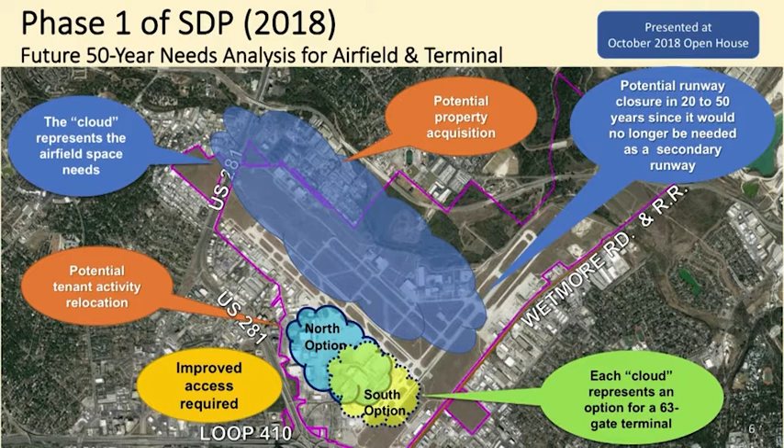So then we had another slide we used at these meetings, the open houses and with council, where we specifically said, will it fit? The answer is yes. And there's of course some caveats, including governmental approvals, funding and environmental approvals. Some land acquisition would be needed, and several other caveats. But this was accepted by council on October 31st, 2018, and that answered the question.

So then we needed to change to a new phase of work. Okay, now that we know that, we're not looking for a new airport site. We're looking at how to best make things fit at this airport. So we kind of changed gears. We said in phase two, okay, now we're starting over. Now we need to figure out how it's going to fit. If we know it fits, how is it going to fit in a 20-year horizon?

So instead of the high growth, aggressive growth scenario, we looked at what's the most likely growth scenario. Same with the horizon. 50 years is really kind of out there, but now we're doing more realistic planning. Let's look at a more reasonable planning horizon, and that's 20 years, which is also the FAA's typical planning horizon for efforts like this. And lastly, we didn't have things coming online extra early. Now we want to plan for things when they're more likely to actually be needed, so that the plan is more usable.

So that's kind of where we started with phase 2. And then the first thing you start with when you do these types of efforts is the airfield.

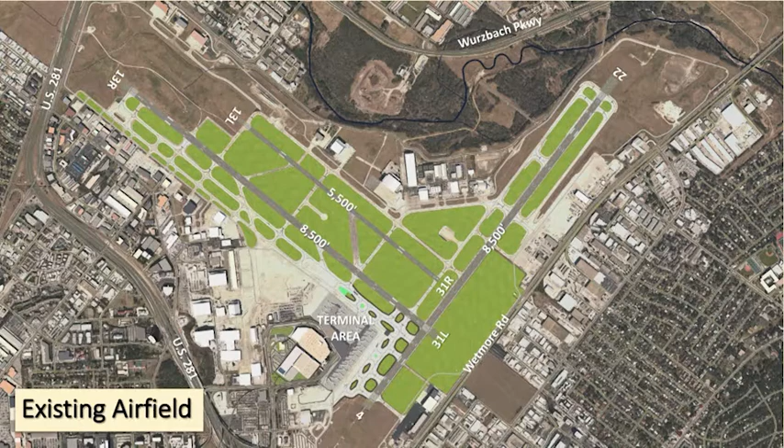Now that we've oriented ourselves, let's talk a little bit about the needs we're trying to accommodate. There are a number of needs, and they fall into three clear categories.

The first one is safety. Everything in aviation, every aspect of aviation, is about safety and always looking for ways to enhance it and make it better. We'll show you a specific opportunity here in a moment.

The next thing is, as the city grows — and as you heard, this is a rapidly growing city — as cities grow, airlines tend to want to look at that market and serve more and farther international destinations. So we need to plan for what that means.

Also related to growth, more passengers also affects the airfield. It means more aircraft movements. More aircraft movements means at some point you can't process enough aircraft on the airfield anymore, and you start to have delay and congestion. Right now you don't have that, but we want to make sure you don't get that in the future. So we need to look at the capacity of the airfield — how do you accommodate the growth in operations?

A little bit more about the safety needs. This is a blow-up of the image you saw a minute ago. The runway going to the upper right-hand corner of the screen is that crosswind runway 4-22, and you can see the beginning of runway 31 left is right on top of runway 4-22.

There's an aircraft there actually on runway 4-22, if you can see it. What occasionally happens — and this is rare, but we don't want it to ever happen — is someone inadvertently misses the stop markings there and goes toward or actually onto the runway. That's because the geometry there, the physical layout, can be disorienting to some pilots who are busy doing other things or aren't familiar with the airfield. So we want to look at opportunities to make that geometry, that layout, essentially foolproof so people can't inadvertently taxi onto the runway.

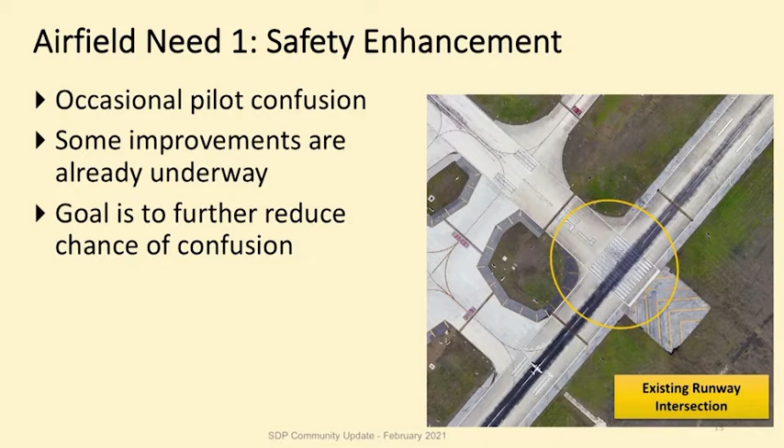So that was the safety opportunity or need that we looked at.

That third need was about the growth in operations, the number of aircraft movements on the airfield. What you see on this graph on the left side is a 20-year period we're working in; the right side is from the 50-year effort. The green line is the most likely forecast — that's the FAA-approved current forecast of aircraft movements on the airfield.

You can see that before the end of the planning period, there's that orange box — that's an improvement to the existing runway.

The capacity of that is slightly suboptimal, and we'll talk about that in a moment, but that would be the first thing you do. Once that's been done and growth continues, at some point you need to look at what's the next significant increase in capacity. For the purpose of this exercise, we're not assuming FAA technology will improve or do away with that.

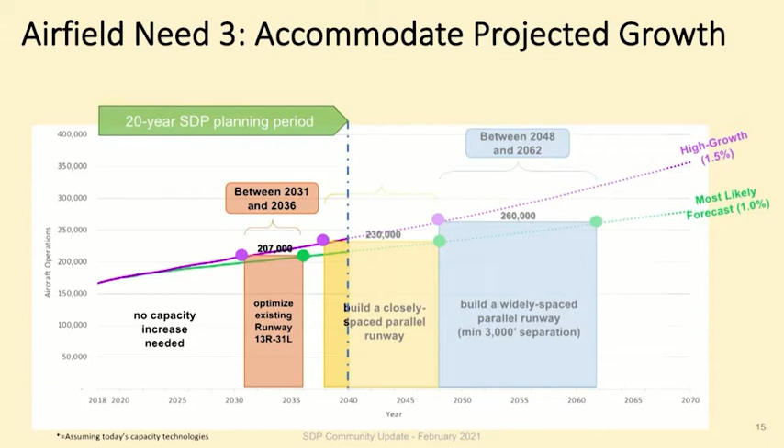So those are the three needs we're trying to accommodate. And now let's talk about the solutions.

We developed a whole range of potential solutions and then went around trying to gather more ideas. In the middle there, you see a working group coming up with ideas in August of 2019. We then took those ideas, and as we started evaluating them, we put them in a binder, which you can see on the left there. We had all the options in there. Ended up with 91 options, took them to various public events, showed people what we had, and asked them, are there any other ideas, anything we're missing?

We wanted to make sure we had all ideas on the table, that we weren't just starting with things that had been looked at before or things that we technical folks thought would be a good idea. So we literally got an enormous range of input, including a circular runway and runways outside of the current freeways that surround the airport.

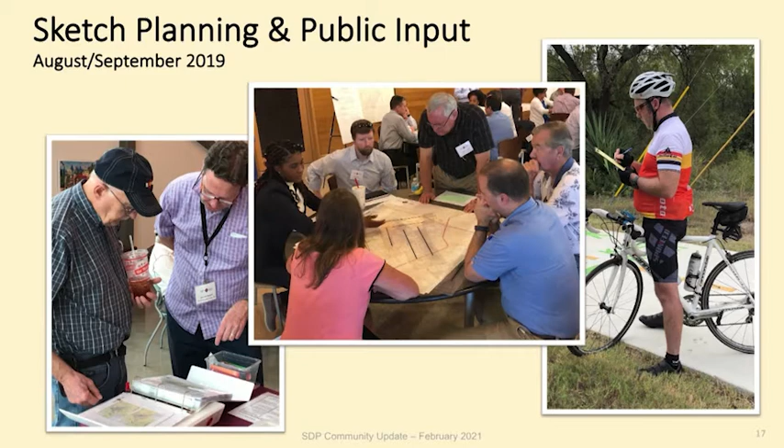On this next slide, you see the evaluation process of those options. We started with 91, we ended up with 2 and ultimately 1. What you see here is sort of a 'we are here' chart. The star started out on the left side as we had the 91 concepts. As we evaluated them, some were carried forward with the green arrow, some were modified if they had a flaw that could be improved upon. And if not, they were dropped out in that round, and fewer carried forward.

You may have seen that at some of our previous meetings, because we kept tracking where we were as we went along.

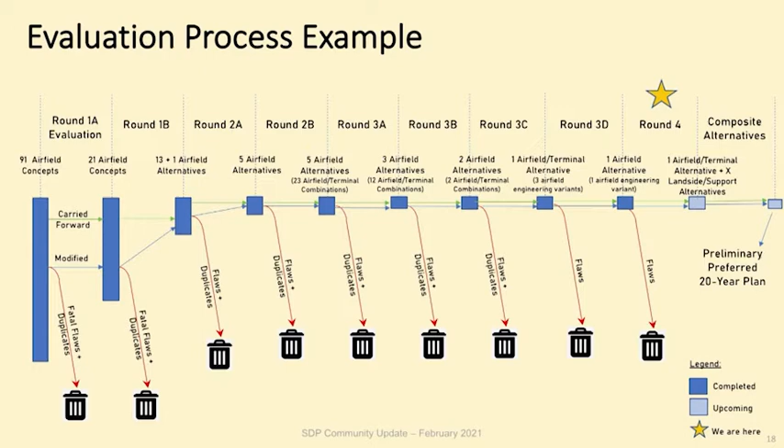Here are a few fatal flaws. A fatal flaw is kind of a funny term for a make-or-break criterion that you use early in these evaluations. So when you're trying to add more runway length, when you're trying to provide for more capacity in the long term, you don't want to look at alternatives that decrease capacity or make safety worse or things like that. Those are make-or-break factors that we came up with that knocked out quite a few alternatives.

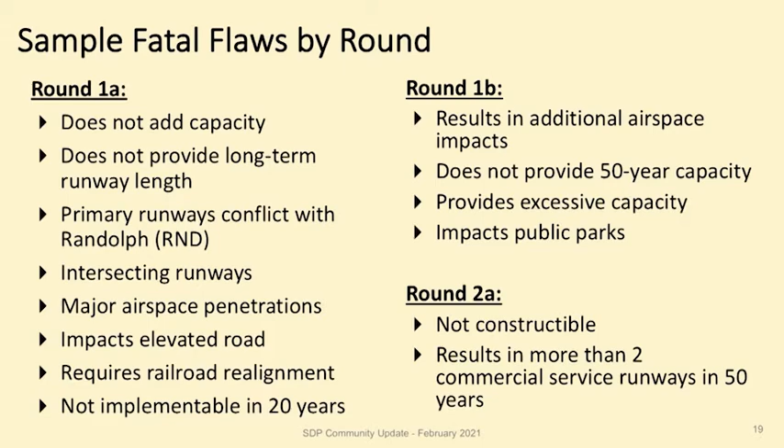You'll see one here we'll talk a little bit more about as an example, which is the primary runways' conflict with Randolph. A little bit more about that here in a minute.

So again, we started with 91 concepts, and a full 35 of those had some variation of a northeast runway — a crosswind runway that they either extended or added a parallel to, or sometimes even 2 parallels to. In other words, these were ideas that people came up with that made the direction of the airport switch at 90 degrees into the northeast direction. Those were eliminated because what's today a manageable conflict would become worse, and also the capacity increase of the airport would not be provided either.

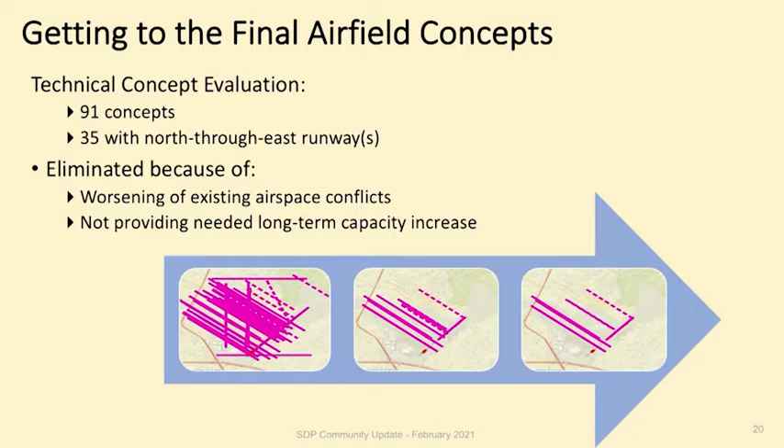And to make it worse, these flight paths cross not just two-dimensionally, they actually cross at more or less the same altitude as well. So the controllers currently deal with the situation. They talk to each other. They have a memorandum of understanding between the facilities.

So it's safe and it's something they can manage. Mostly what they do is when Randolph has a big mission, San Antonio yields, which means San Antonio stops using 4/22 and goes to the 13/31 direction, which is that main direction, until the Randolph sorties or activity is over. There's also another base to the southwest where there's some interference, but this is really the main interference. And today it's very manageable.

But you can see that if you made the main direction of San Antonio the constant flow in the direction of the yellow arrow, you make what is today a manageable problem into something that stops the airport from operating periodically. And obviously that's not viable. Also stopping operations at Randolph, of course, is not viable. So those types of alternatives were not considered further, and this is why.

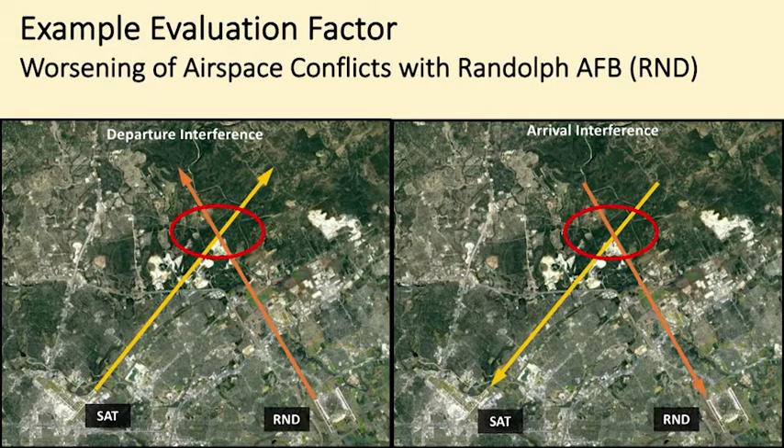The problem is in getting there. So with the alternative on the right, you really can't have a longer runway until you build that parallel. And in the chart we just had a minute ago, you saw that the parallel is not needed until after the 20-year period. So that means you really wouldn't have an opportunity to extend a runway if the airlines wanted to go to farther destinations. So it kind of ties your hands.

Whereas with the left alternative, you have the opportunity to extend the existing main runway in small increments as needed before the parallel is built, decades from now. So in the end, that's why alternative, then called AF14 as a technical working drawing, became the preferred alternative. And then we left off.

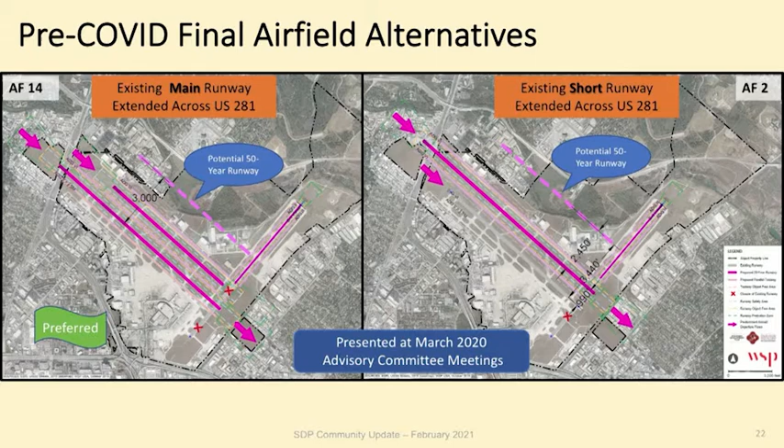So we paused all the work to figure out what this meant in mid-March, restarted work later in the year, and currently are underway and are giving you this update on what we've achieved.

One last note on COVID, which is that the current forecast that we're using, which is that most likely line, may be off. We know in the near term what the COVID impacts are. Things are well below any kind of forecast in the next few years, but longer term, we're not really sure. Are we going to recover in a few years? Will we be back on track, or is it a more permanent shift? There's a lot of debate about this in the industry.

And so what we're doing is, for now, we are continuing to use the existing forecast, but in a few months, we're going to put our heads together, talk to FAA and say, okay, do we keep doing this? Maybe we're kind of over planning, and we may not actually need some of the projects we're coming up with, or are we going to shift the forecast, or perhaps even completely redo the forecast? So we don't know that yet. We recognize we might be slightly over planning for projects that may not be needed and will not happen when we think they might happen. So more on that as we update and have a decision on that.

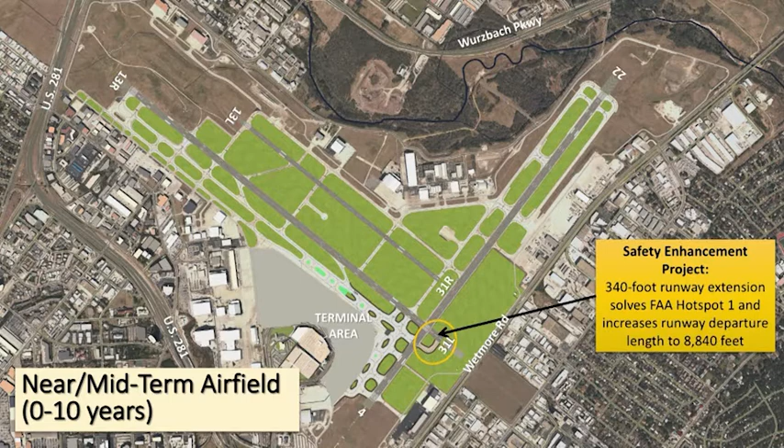What we've come up with after a number of technical meetings with all the airside stakeholders is a short extension of that end of the runway to basically relocate the end of the other runway. So someone taxiing there will no longer be able to confuse the two ends because one end's offset from the other runway, making it visually clear where the runway end is. You also see a little taxiway there connecting to it so aircraft can wait over there. This has been reviewed with a safety risk panel and found to be a viable solution. Of course, any of these projects are subject to final FAA and city sign-off, but preliminarily, this is the solution for the safety enhancement at the airport.

Looking a little bit farther out in the future, in this 10 to 20 year time frame, there's two projects. One is the big one, so we circled it, but there's a small one for those who are interested. Right across from the terminal area is an angled taxiway coming off the runway. There's one there fairly close to that today, but it's not in the ideal location for today's aircraft fleet mix, and also the angle isn't quite ideal. So what we're proposing is to address that with this particular taxiway shown here. It'll allow aircraft to get off the runway more quickly, which will increase the throughput rate of the runway somewhat and postpone the need for any further capacity enhancements like the parallel runway.

But the big project you see here is this extension on the other end. So we talked before, on the one end we have about 340 feet of extension. What we're looking at here on the other end is about 1,250 feet. That takes us just short of 281. This gets us that 10,000 feet that we saw on the range chart work so well for international long-haul flights. So this fits just perfectly on the property and makes a lot of sense.

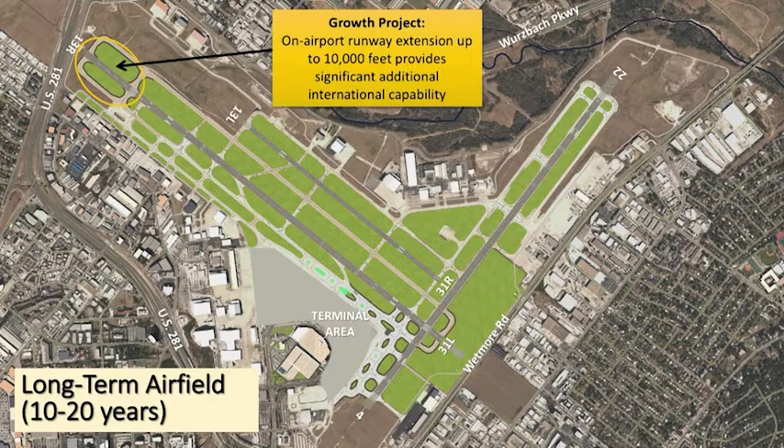And also to figure out what height, what elevation the runway end should be at, so that if in 30 or 40 years, future generations who are going to be flying on future airlines to future destinations find that they still do need that 10,700 feet, those last 700 feet, there is that opportunity in the future to consider going over 281. We've coordinated with TxDOT, and they're aware of the thinking on this, but what you're seeing here is an elevation that would work, and this would fit on the property, and we made sure that it did. So this is what that 10,000 feet on airport would look like.

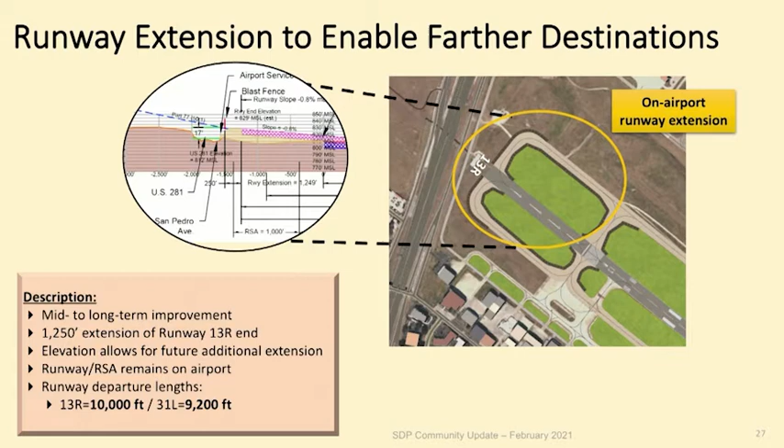And that's the airfield. Now let's talk about the terminal, the other big component. There's a number of needs there as well. They can be grouped into three categories. Again, first, it's about accommodating growth, but not just accommodating growth. For the terminal, we said, let's look at high growth, because it's so disruptive to do expansion to a terminal building while it's in use, which is always the situation you're in at airports. So let's make sure that when we do an improvement, it lasts long enough, it has enough capacity, so we don't have to come back a few years later and rip everything up again.

So that's why we're looking at high growth demand, just to make sure we can accommodate it. The other need is we need to make sure we have a world-class experience for the customers, for the travelers. We heard this from the mayor's appointed committee, the airport system development committee, as well as our advisory committees and the general public. We got lots of feedback on that. That's what people are expecting, and that's what we're planning for. The third need that really needs to be addressed is Terminal A. Terminal A dates back to the 80s. It's functionally obsolete, meaning today's aircraft, today's use, the space doesn't quite work for that, as well as the systems. Everything that's behind the wall or underneath the floor is starting to get old, down to little details like electrical systems and sewers. So that's all an issue that we're aware of, that we need to look at.

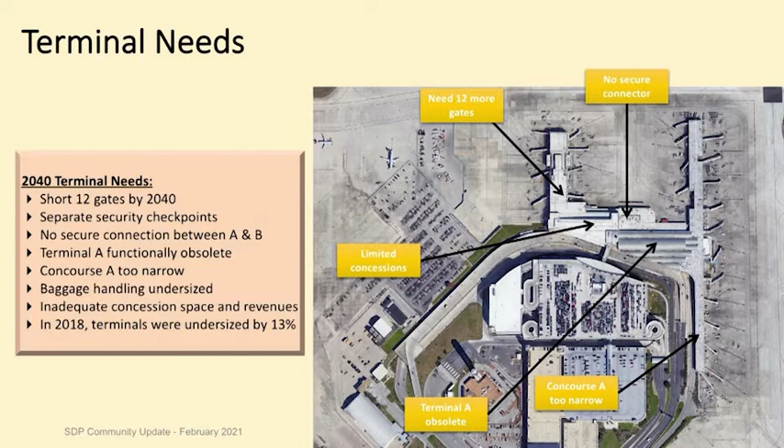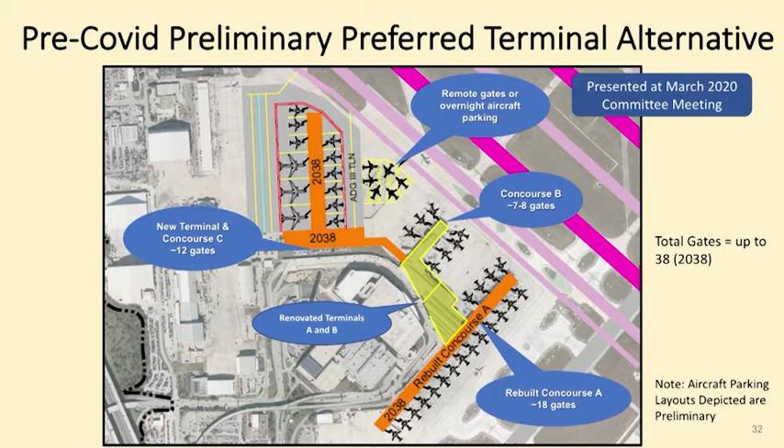So with the COVID delay, we had a chance to kind of rethink what the C could look like and refine where we left off. I mentioned today's standards.

Some of the standards we're using as we look at these new terminal alternatives are on the right, and you'll see the existing terminals A and B on the left. You can just see that the north end of A, where we saw that crowd, that's only 77 feet wide, and the southern end is even less than that. What we're planning for is a 110-foot wide concourse, which is kind of the new industry benchmark. If there were international gates on one side, it would be wider, about 120 feet. If you had an alternative where there might be international gates on both sides of a concourse, you would need to be wider still, about 140 or so.

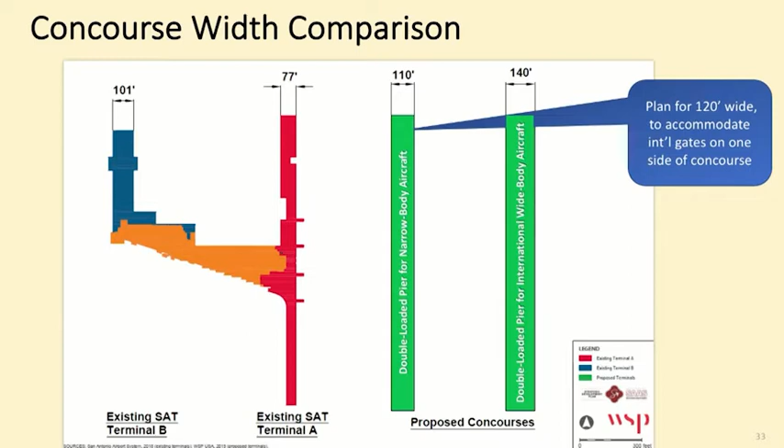And in fact, we're still open to input and would ask you to go to the website and let us know things that you don't feel are captured here, or add your voice to the mix. An additional 700 people took the time to actually fill in by hand additional observations beyond just the survey questions.

So this matches with what we were looking at on the technical side, what Jesus has been saying, the director, and what you've all been saying. So it's all pointing in the same direction. This is all part of what we're looking at. So we are still in the middle of developing terminals and don't have a final preferred plan or anything like that to show you.

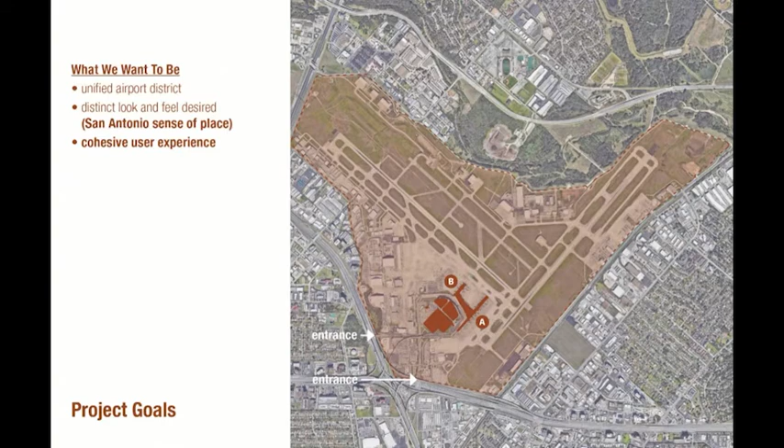We went through a document visioning exercise and moved into concept development. As is consistent with a good portion of the aviation community, our project went on hold due to COVID in April of last year. And this gave us a good opportunity to take a pause and begin a community engagement series of events.

So we had engagement presentations to aviation leadership, to city leadership, Airport Advisory Commission, and a briefing to the mayor. And we are now moving towards community outreach with sessions such as this, offering the community at large opportunities to provide input on the principles developed to date.

After this is wrapped up, we will move forward with production of the document, and we will finalize the document hand in hand with the strategic development plan in June of this year. And that will allow the concept development phases to proceed as defined by the visioning exercises that we're conducting now.

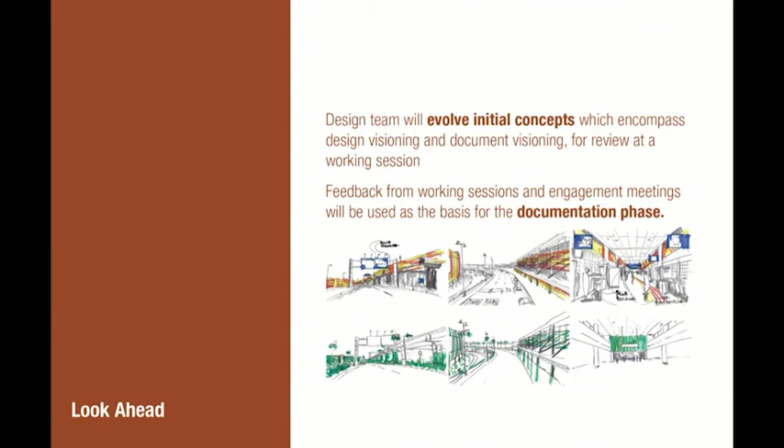Looking ahead, the design team will evolve initial concepts encompassing the visioning, and we'll review those at subsequent charrettes. Feedback from the charrettes and engagement meetings will be used as the basis for the documentation phase, which is really just consolidating everything into a design visioning book. It's a live document accessible to anyone on the website, so the term 'book' doesn't mean it will be bound and published other than electronically.

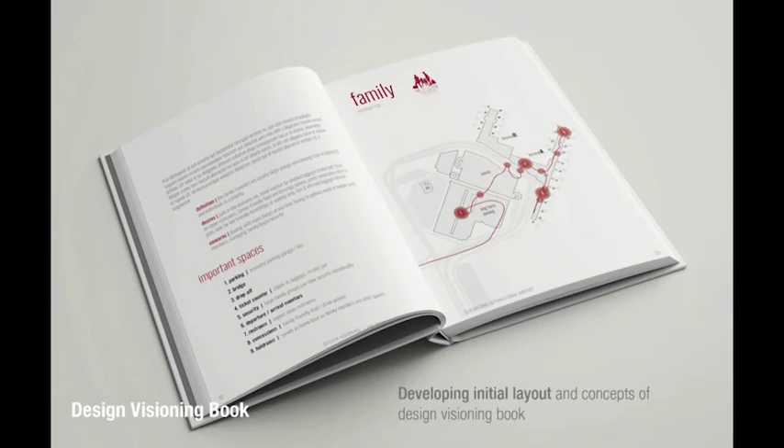And that wraps up the presentation component, and we're ready to move into the question and answer series.